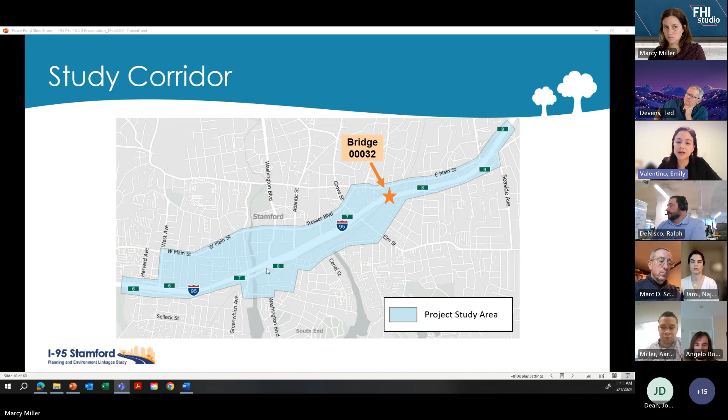We've also expanded the study area to include the Stamford local roadways, and that is north and south of the I-95 mainline, including North and South State Street, going up to Tresser Boulevard in the north and South State Street in the south, and a little bit south of that. So what's our study approach? How does a PEL study work?

So we've talked about in the past existing conditions. You identify the existing conditions and the project challenges and constraints - those are the needs and deficiencies. What we'll talk about today really focuses on steps 2, 3, and 4.

So establishing that draft preliminary purpose and need, that's the project justification. Establishing a high level and reasonable universe of alternatives, which you can think of as a menu of items to consider.

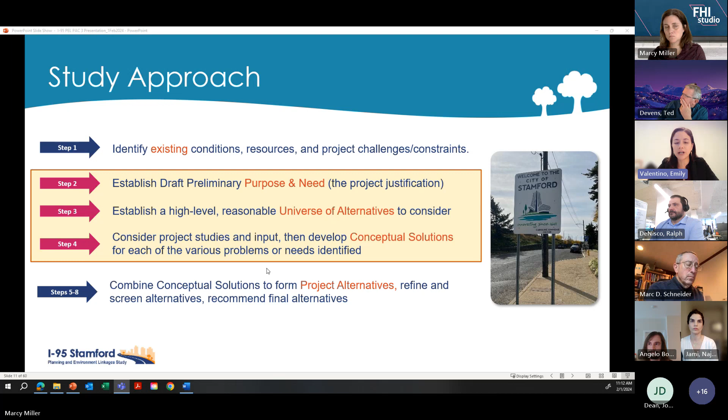Considering project studies and input from agencies and the public, we then develop conceptual solutions. That's what we'll talk about today. In the future, we would combine those conceptual solutions to form project alternatives, and that's where the refinements and screening comes in, and then recommending final alternatives.

So let's do another purpose and need review. We're continuing to refine the purpose and need statement throughout the early stages of this process. Here's a reminder of what goes into it: goals and objectives of the study, transportation deficiencies in the study area and on the corridor, as well as public and agency input. Those are all considered when developing this purpose and need statement.

Here's the draft preliminary purpose and need. There are no material changes since the last meeting. As a recap, this is the primary purpose and need: 1, to improve mobility along the I-95 corridor, and 2, to improve the crossings of I-95 over the Metro North Railroad and Myrtle Avenue, that's Bridge 32. All of the final alternatives that we recommend from the study must satisfy this primary purpose and need statement.

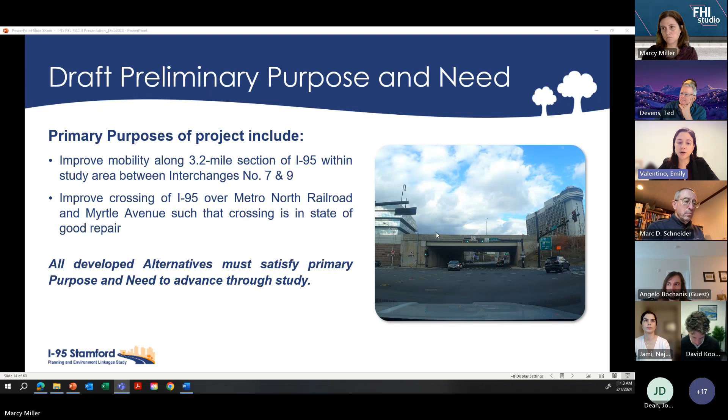And other desirable outcomes of the project, also known as secondary purpose and need - these are still part of the purpose and need statement. First, increase mobility for all users in the local roadway network within the study area, including the portals under I-95. The second bullet is new since the last meeting, added based on feedback from this group, so thank you - that's to enhance the cross connection of communities adjacent to I-95.

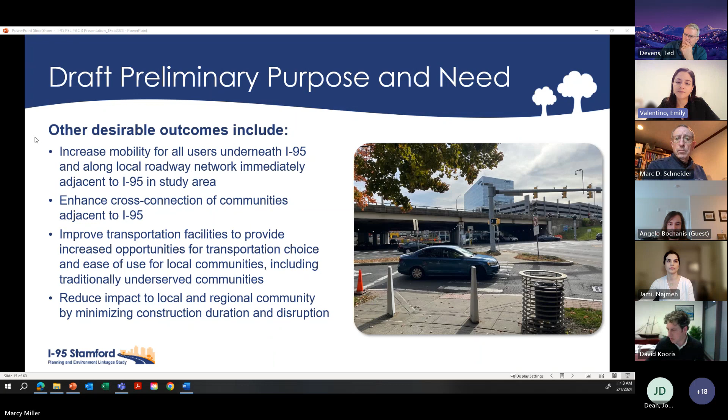Third bullet, improve transportation facilities to provide opportunities for transportation choice - that's buses, bicycling, for example - and also ease of use for local communities, including traditionally underserved communities. And finally, reduce the impacts during construction. While our mainline alternatives are not required to satisfy these tenets, we're still studying and recommending improvements for the local roadways, which Ralph will explain more on in a moment.

So again, to reiterate: the primary purpose and need focuses on the I-95 mainline and will include recommendations relating to improving I-95 bridge crossings, mainline operations, and connections to and from the local roadways. If any mainline alternative does impact the local roadways, we will study and mitigate those adverse impacts and recommend improvements.

The secondary purpose and need, which complements the primary, will focus on the local roadways with recommendations around connecting communities and improving transit accommodations. Of course, safety is in both of these buckets, so it's both primary and secondary.

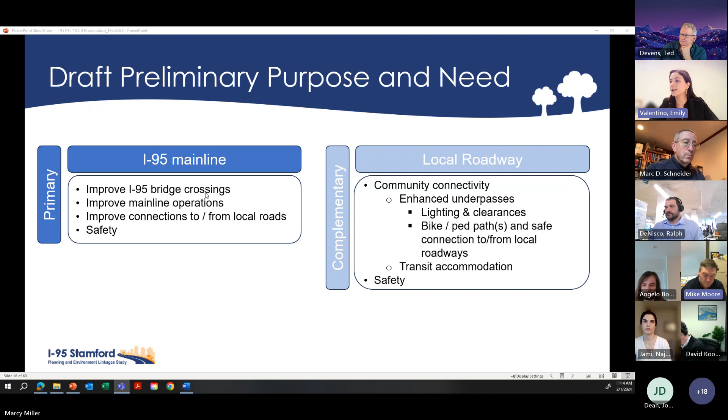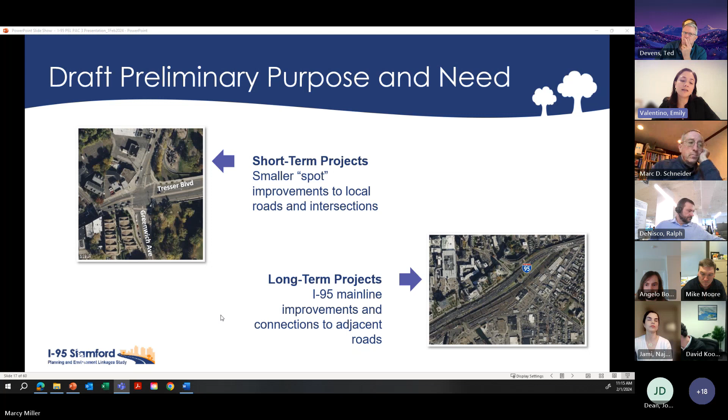Again, just to reorient: the primary purpose and need focuses on longer term projects, evolving around mainline ramps and North and South State Street improvements. The secondary purpose and need focuses on more shorter term projects, the smaller spot improvements to the local roadways. We can show that in a timeline: the breakout short-term projects on the local roads will occur before the long-term alternative projects.

All right, universe of alternatives. Now that we've re-reviewed the purpose and need, the next step in the process is to come up with a universe of alternatives. That's kind of like a menu of items that Najmeh will describe now.

As Emily mentioned, one of the initial steps in our project process is setting up a universe of alternatives. You can think of this as a brainstorming realm, where we toss in various transportation improvement ideas and concepts that could potentially be feasible solutions for our project study area. This serves as a toolbox for us to evaluate different options for this study area, and then we'll screen them to identify the most workable and feasible solution, ultimately determining the final alternatives for our project.

This step is also required under NEPA, the National Environmental Policy Act, for any comprehensive environmental impact assessment studies. So by tackling this now, we are giving ourselves a head start for the next phase of this project. It's also important to note that the initial list includes a wide range of options, and not all of these options necessarily meet the primary purpose and need for this project.

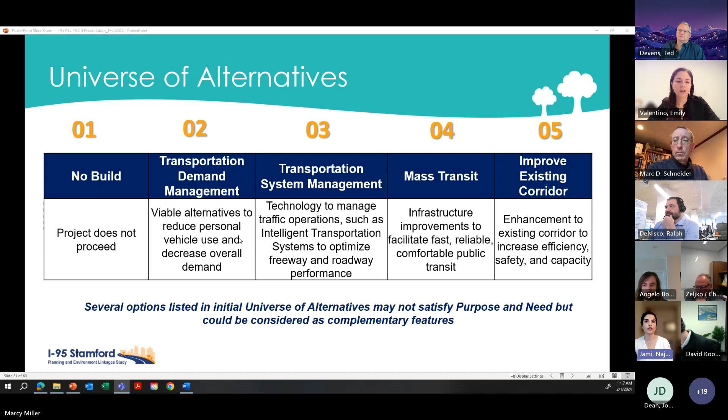And as I said, although not every option meets the purpose and need of this project, they could still serve as a valuable complementary feature to improve overall mobility within our transportation network. In the following slides, we're going to go through each of these categories to look at some practical examples.

Thank you. So let's look at the first 2 categories. No build. This concept is pretty simple: the project does not advance, and we continue with ongoing maintenance.

Second one, transportation demand management. This approach is about reducing overall demand on our transportation network. It's not just infrastructure improvement for vehicular modes, but also exploring strategies that can offer more sustainable travel options, from park and ride facilities to encouraging alternative modes of transportation, such as cycling, walking, and carpooling, and implementing high occupancy vehicle and express lanes.

Then moving to the next category, transportation system management, or TSM. TSM represents strategies that aim to optimize the existing transportation network using approaches that make better use of what we already have, rather than expanding our roadway or building new infrastructure. It focuses on approaches which utilize real-time traffic condition data to make dynamic decisions to improve traffic flow. For example, ramp metering, as you can see on this slide, is one example of TSM.

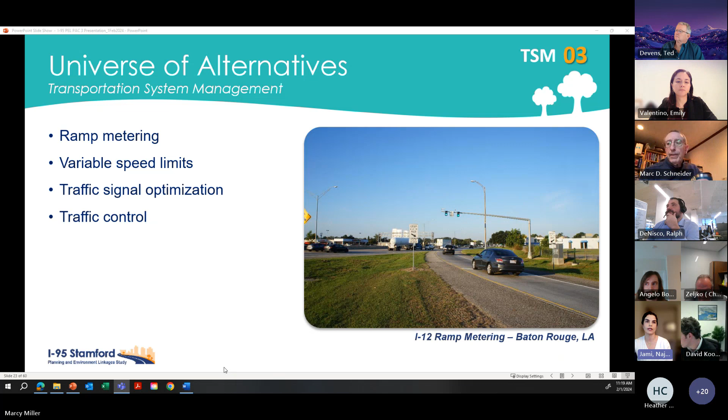Next one, mass transit. Under this category, we delve into approaches to enhance transit infrastructure. We consider options to improve the efficiency of public transportation, which could also contribute to a more sustainable and accessible transportation network. We can consider concepts on a larger scale, such as introducing or expanding bus, streetcar, or rail services, or on a more localized level.

These improvements could include implementing a dedicated bus lane or upgrading bus stations for a better experience for transit users, and to encourage more people to actually choose public transportation.

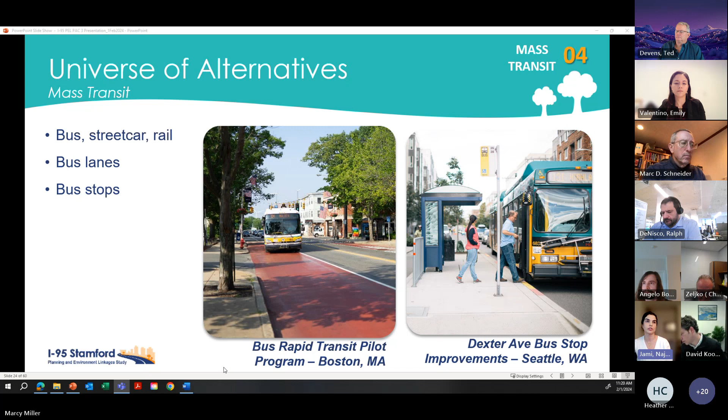Final category that we included in our universe of alternatives focuses on improving existing corridors, relevant to both mainline and local roadways. Let's look at the concept for the mainline first.

As we all know, a key driver of this project—could we go back to the last one—is to improve the deficiencies of Bridge 32. And while we consider concepts and solutions to improve that bridge, we are also looking at ways that can be combined with those solutions to not only facilitate the reconstruction or improvement of the bridge, but also improve overall mobility along the I-95 mainline corridor within our study area.

This can be achieved in various ways, such as reconstructing portions of the I-95 corridor in Stamford. We can also consider ways to improve existing features of the mainline, such as the efficiency of the curvature and sight distance, and improving local roadway connections to the ramp termini.

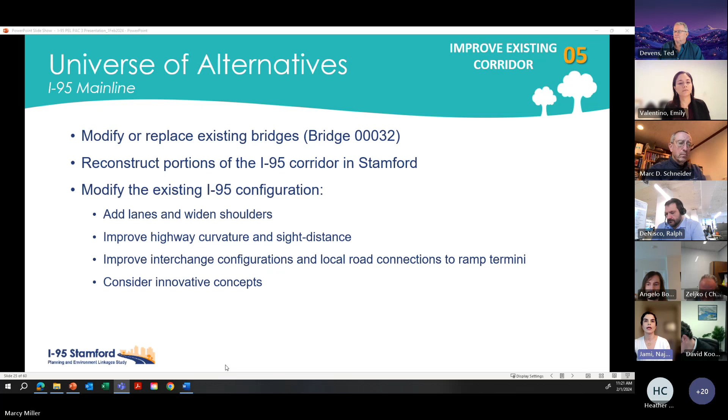Now we can see how some of these concepts could actually look. For example, constructing an express lane is one method to consider to improve capacity of the mainline by providing a designated lane for drivers with longer distance trips. This can be achieved as either an elevated expressway, which you can see on the left, or as an at-grade express lane option in the middle of the current alignment of the I-95 mainline.

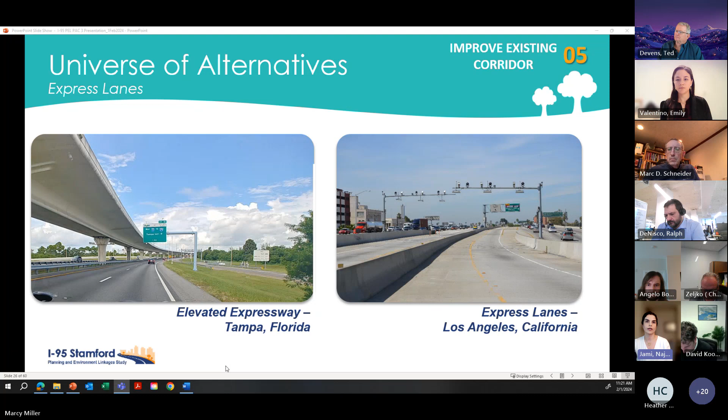Another example within this category is construction of a tunnel. As you can see on the right, a tunnel can provide extra space above for the local roadway network to be utilized for various purposes, such as green space or a pedestrian plaza. We can also see on the left that it demands significant space and right-of-way during construction.

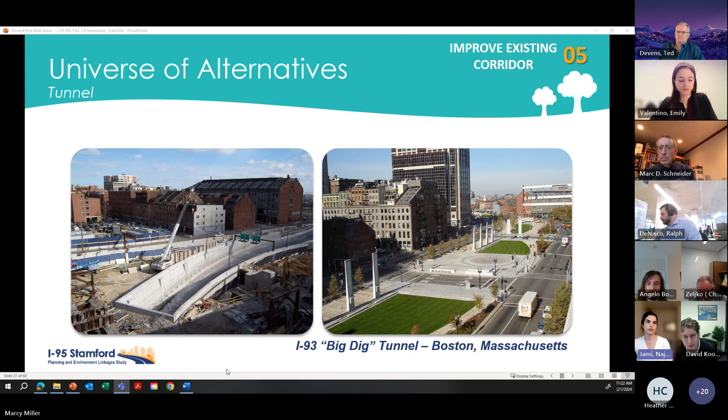Now let's talk about concepts we consider in our universe of alternatives to improve existing corridors, but this time within the local roadway network. For local roadway improvement, we aim to explore options that reflect the needs and preferences of local communities to create an inviting environment for every user. That's why we have these conversations. We consider concepts which improve safety, efficiency, and mobility of the transportation network.

Some of these concepts include optimizing the interchanges where the ramps intersect with local roadways. We can also look at enhancing underpasses to accommodate various modes of transportation, such as pedestrians and cyclists, and improving community connectivity. We look at ways to improve lighting and clearance of those underpasses, too. We seek opportunities to promote various transportation choices to make local communities, especially underserved ones, more accessible. And of course, we look at ways to improve and enhance safety, such as traffic calming measures.

So now we are looking at some visual examples of how these concepts might look. Let's think of Tresser Boulevard and some of the intersections along that, which are pretty similar to what we see on this slide. One way of improving our local road is by bringing its current features up to standard, such as upgrading the striping and building more visible elements, as you can see on this photo. With this approach, we can enhance safety and efficiency by making the most of the existing infrastructure.

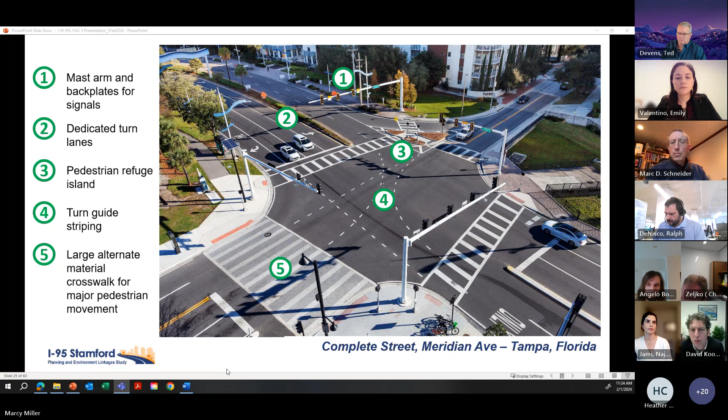Here's another example where we can transform pedestrian crossings by introducing a more standardized refuge and mid-block crossing. These simple improvements could make it safer and more comfortable for people to walk along and cross the roadway.

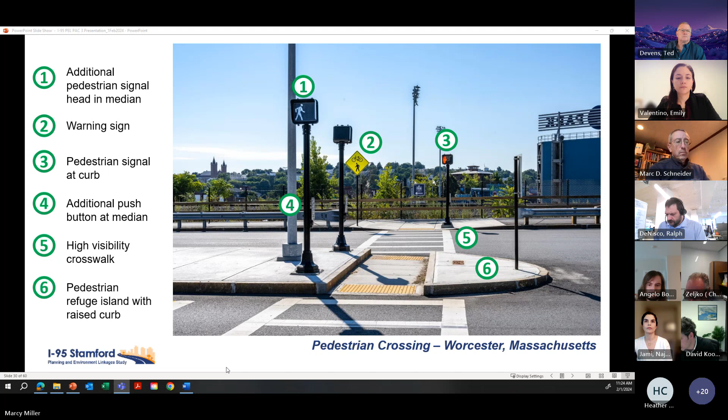As we've seen through this section, if you could go back to the last slide, these are just some examples from a broad range of concepts within our universe of alternatives. As we consider these concepts, we dive deeper into evaluating and analyzing which solutions are not only imaginable, but also feasible and workable for our study area.

Ralph later on is going to talk about our approach and how we screen these options for local roadways. But there's one thing I wanted to mention here because it's related. In our approach, we will take into account current projects and also guidelines and design criteria. This slide talks about complete streets, which resonates with the latest Connecticut Complete Streets design criteria that encourages all projects to focus on improving peds, bikes, and transit facilities to provide a stronger intermodal transportation network and also enhance safety.

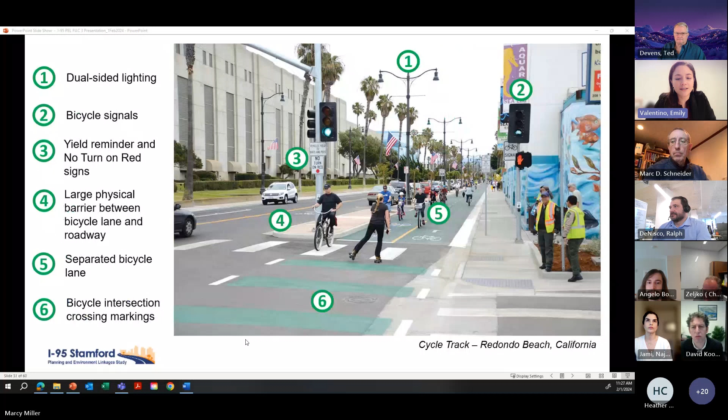Oh, you can go forward. You're going backward. All right, let's get into it. Apologies, my computer just freaked out on me. That's okay, Phil has his hand up though. Hi, Phil. All right, Phil. It took me a while to find out how to raise my hand. I'm actually blind. I have a quick question.

I appreciate all the presentation, I may have missed the first couple of minutes trying to log on. But with respect to pedestrian right-of-way and travel, you mentioned some options with sidewalks being parallel to the corridor and having them perhaps separated by trees. I always look at things from the perspective of accessibility, and I want to make sure this is built into the project equation, not after the fact — making sure that if we're planting trees on the sidewalks, they're not encroaching into the pedestrian right-of-way. We see a lot of this in the city of Stamford now, where tree limbs are at face level, which we've smashed into. How does this get factored into the formula, so that if we're planting trees, we make sure they're the right kind that don't buckle and raise the sidewalk, provide trip hazards, or impede the pedestrian right-of-way as a protruding object?

Thank you, Phil, for the comment. That's something that will be looked at in design - the designers will have to consider appropriate species and placement of those trees. As you mentioned, we can't restrict the walking area. We have to meet PROWAG requirements, the standards for sidewalk width for accessibility. Part of that will also be the future maintenance of those plantings. So there's every aspect of the project life cycle here, but those are things we take into consideration.

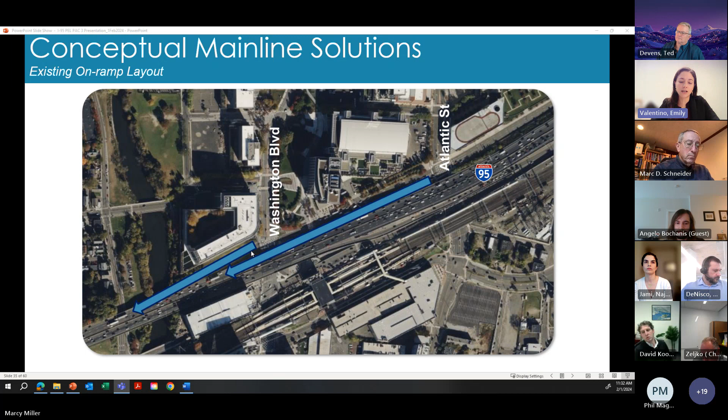Well, our first conceptual mainline solution that we'll show today is - drum roll - next slide please. You can go to the aerial. Did it not go to the next slide for you? It went, you skipped two slides.

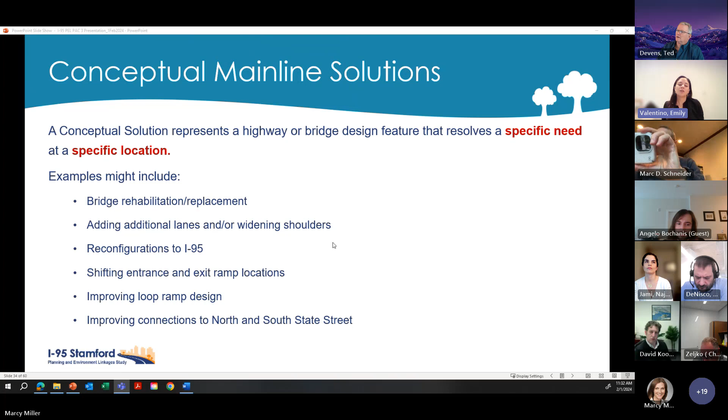So what if we combine those on-ramps before they enter the main line? There would be no changes to the local roadway network - you'll still have an on-ramp from Atlantic Street and from Washington Boulevard. But the on-ramp from Atlantic Street will continue parallel to I-95 and merge with the Washington Boulevard ramp before it enters the main line. In essence, you'd be removing one of those merge points onto the main line, which will help alleviate congestion - there'll be less merging and less friction in general.

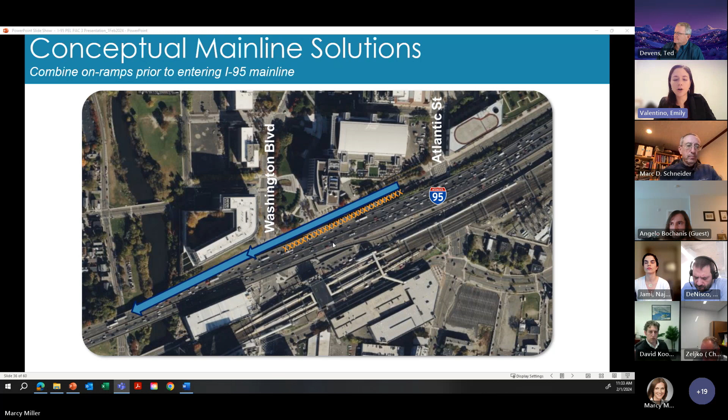We can show that here graphically on the next slide. You can see the orange dotted arrow onto the southbound lanes - that would no longer exist, that would be removed. The entrance ramp from Atlantic Street continues next to the I-95 main line, merging with that Washington Boulevard on-ramp. We can also look at this in terms of off-ramps.

Off-ramps tend to cause congestion. For instance, if a vehicle is in the fast lane or the innermost left lane and wants to get off, it has to merge over two or three lanes to reach the exit. Any sort of merging like that will create congestion.

So one conceptual solution would be combining the two off-ramps that exist today. Currently there's an off-ramp to Elm Street and one to Canal Street. What if that became just one off-ramp, one exit point from Elm Street? That's at interchange 8. It could be a two-lane off-ramp to accommodate the added vehicles.

Again, no changes to the local road. You'd still have an off-ramp to Elm and one to North State Street, but the ramp would run parallel to I-95 as it approaches Canal Street.

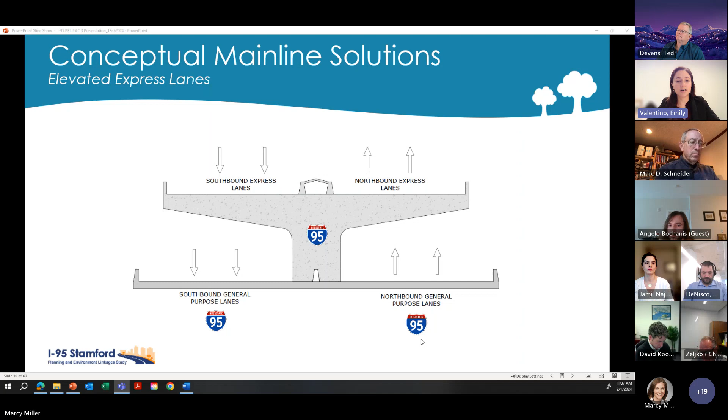There would be general purpose lanes for people going to and from Stamford, and express lanes for longer distance trips. Express lanes could also be at the same grade as I-95, as shown in the next slide, separated most likely by a barrier to accommodate those longer trips and prevent drivers from exiting onto North and South State Street to bypass congestion.

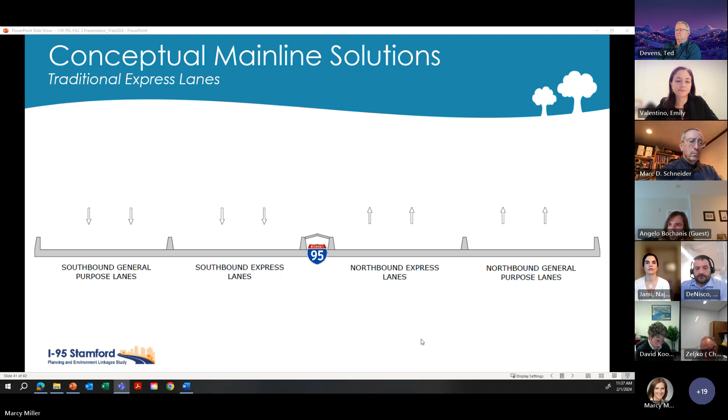Now Ralph will go into our approach for the— oh, hello Angelo, I see your hand up.

Hi, good morning, Angelo from People Friendly Stamford. I just wanted to ask a little more about those conceptual solutions before we move on to the local roadways. My camera's just gotten out of focus now, so that's fine.

For the first one you showed, about reconfiguring the southbound on-ramps, could you go back to that? I wanted to ask what the impact would be on North State Street, since presumably you'd have to extend it further north to accommodate the longer on-ramp. I also wanted to ask about the on-ramp from Washington Boulevard southbound—you said you wanted to widen that to two lanes, which is currently one.

I just wanted to say that already sounds like one we would be opposed to, because crossing Washington Boulevard is already a nightmare. I'm sure you've heard about numerous people in our community who have died over recent years doing this. The idea of taking a crossing on Washington Boulevard—already one of the most frequently trafficked streets for pedestrians and cyclists—and widening it further, especially in the heart of downtown, seems like a recipe for disaster.

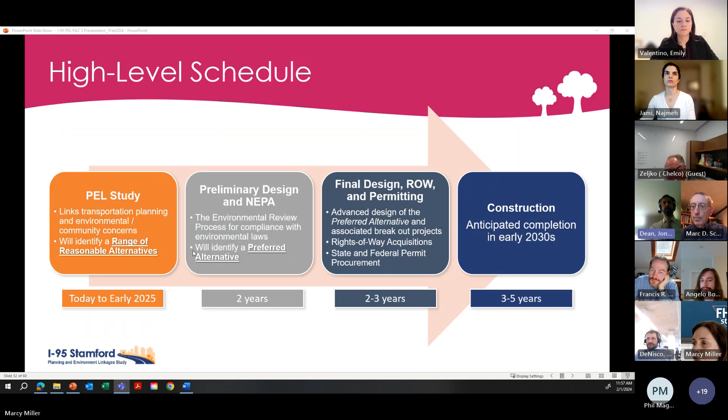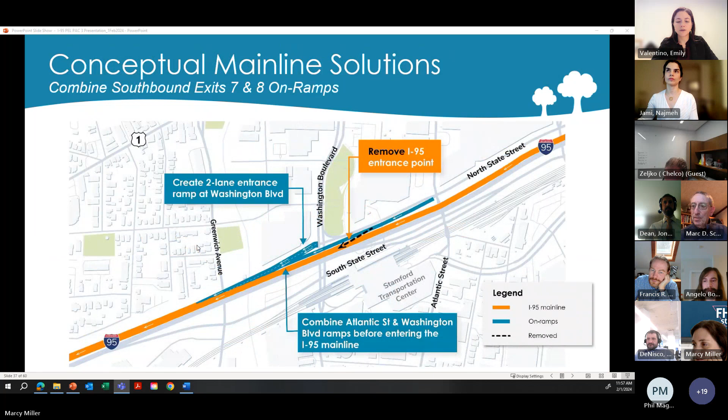I saw the one on-ramp, I didn't see another one. Is that still in discussion? Marcy, can you go back to that graphic? As Marc said, this is one of the conceptual solutions presented. We haven't really studied this in depth yet, but in this scenario...

It would kind of be the opposite of what it is now. If you're going east on Route 1 in this scenario, you'd take a left to get on the highway, and you'd have the right-hand going the other way. We'll have to look at that.

It may cause problems having people turn left from Route 1 to get onto 95 going in that direction. Unfortunately, we don't have a lot of room to keep both ramps and bring them together like we showed before, where you bring the two ramps together and they go onto the highway as one. We'll have to look at this to make sure traffic on Route 1 isn't negatively impacted by whatever we do here.

Because I can see going west toward Greenwich on Route 1, that would be a hard 270-degree or more turn to get on, and the other one, on your right, would be a left turn into whatever traffic is happening on Route 1 at that moment. Okay, thank you.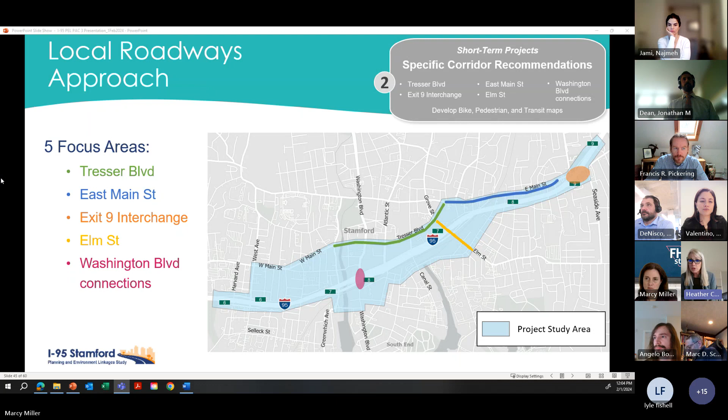But going back to your project, merging and taking out Elm Street and putting that straightaway between those two exits, I think is very impactful, because you have people coming on and people going off at the same time, and that whole congestion appears to be because those two exits are only 900 feet apart. They're so close, but yet they cause so much congestion. And then you have more development coming on the east side too, new apartments being built, the Lafayette, which is right adjacent to 95. So you're going to have more people living in the area. As a whole, the east side is being redeveloped, and East Main Street and that whole area, it's something to keep in mind as Stamford keeps growing immensely.

And I do like where you put the lanes so it's more for people not exiting off of 95, more speed lanes, I think is what you called it. So traffic can progressively move through, because this is, as someone mentioned, such a high usage area for freight trucks and cargo and transportation for all of New England coming through here.